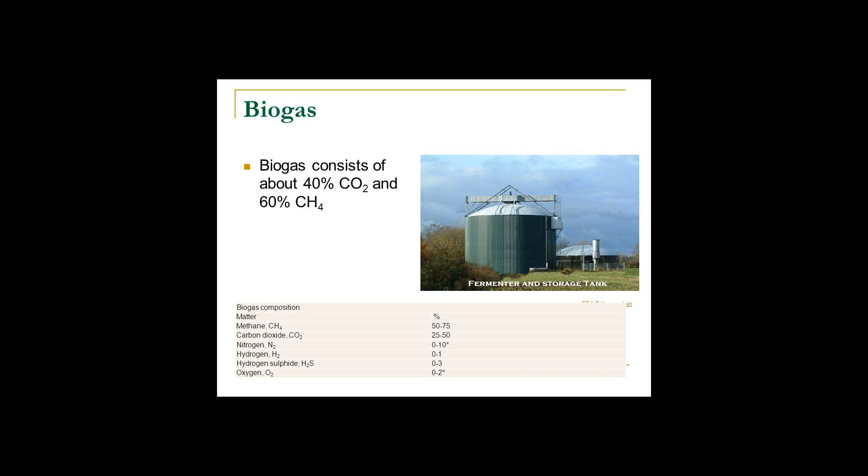Biogas can be produced by anaerobic digestion with anaerobic organisms, which digest material inside a closed system, or fermentation of biodegradable materials. Biogas is primarily methane, CH4, and carbon dioxide, CO2, and may have small amounts of hydrogen sulfide, H2S, moisture and siloxanes. The gases methane, hydrogen, and carbon monoxide, CO, can be combusted or oxidized with oxygen.

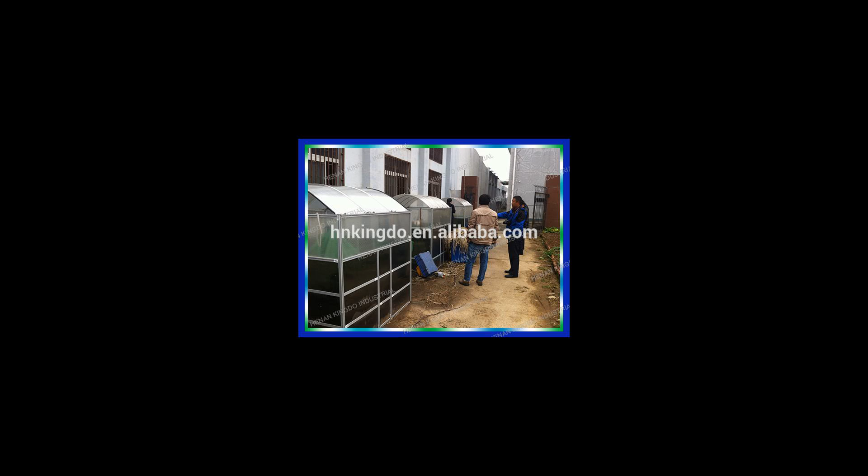This energy release allows biogas to be used as a fuel. It can be used for any heating purpose, such as cooking. It can also be used in a gas engine to convert the energy in the gas into electricity and heat. Biogas can be compressed, the same way as natural gas is compressed to CNG, and used to power motor vehicles.

In the UK, for example, biogas is estimated to have the potential to replace around 17% of vehicle fuel. It qualifies for renewable energy subsidies in some parts of the world. Biogas can be cleaned and upgraded to natural gas standards when it becomes biomethane.

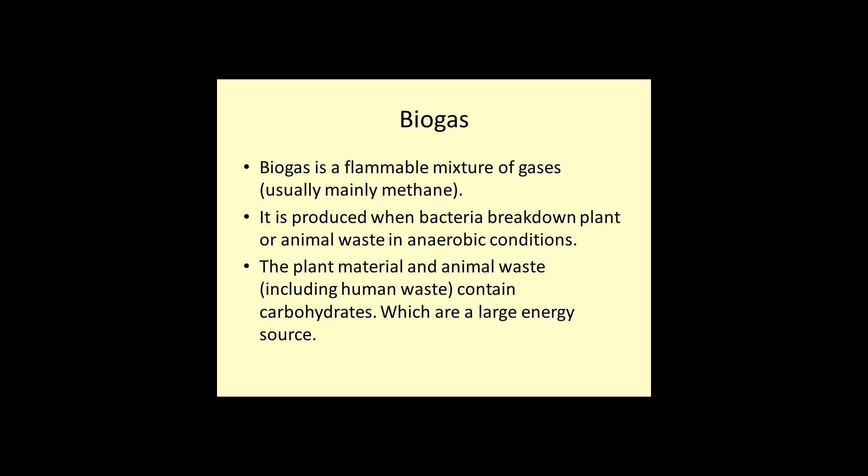Biogas is considered to be a renewable resource because its production and use cycle is continuous, and it generates no net carbon dioxide. Organic material grows, is converted and used and then regrows in a continually repeating cycle. From a carbon perspective, as much carbon dioxide is absorbed from the atmosphere in the growth of the primary bioresource as is released when the material is ultimately converted to energy.

Production. Biogas is produced as landfill gas, LFG, which is produced by the breakdown of biodegradable waste inside a landfill due to chemical reactions and microbes, or as digested gas, produced inside an anaerobic digester. A biogas plant is the name often given to an anaerobic digester that treats farm wastes or energy crops. It can be produced using anaerobic digesters, airtight tanks with different configurations.

These plants can be fed with energy crops such as maize silage or biodegradable wastes including sewage sludge and food waste. During the process, the microorganisms transform biomass waste into biogas, mainly methane and carbon dioxide, and digestate. The biogas is a renewable energy that can be used for heating, electricity, and many other operations that use a reciprocating internal combustion engine, such as GE Jenbacher or Caterpillar gas engines. Other internal combustion engines such as gas turbines are suitable for the conversion of biogas into both electricity and heat.

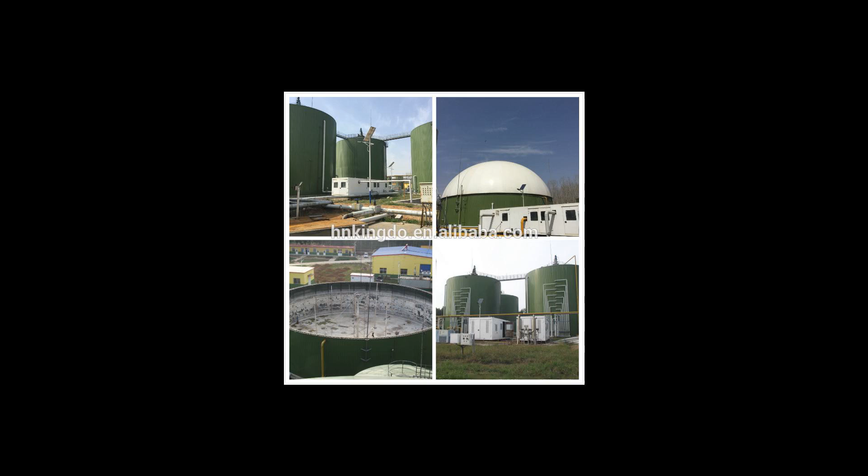Dangers. The dangers of biogas are mostly similar to those of natural gas, but with an additional risk from the toxicity of its hydrogen sulfide fraction. Biogas can be explosive when mixed in the ratio of 1 part biogas to 8 to 20 parts air. Special safety precautions have to be taken for entering an empty biogas digester for maintenance work. It is important that a biogas system never has negative pressure, as this could cause an explosion.

Negative gas pressure can occur if too much gas is removed or leaked. Because of this, biogas should not be used at pressures below 1 column inch of water, measured by a pressure gauge. Frequent smell checks must be performed on a biogas system. If biogas is smelled anywhere, windows and doors should be opened immediately. If there is a fire, the gas should be shut off at the gate valve of the biogas system.

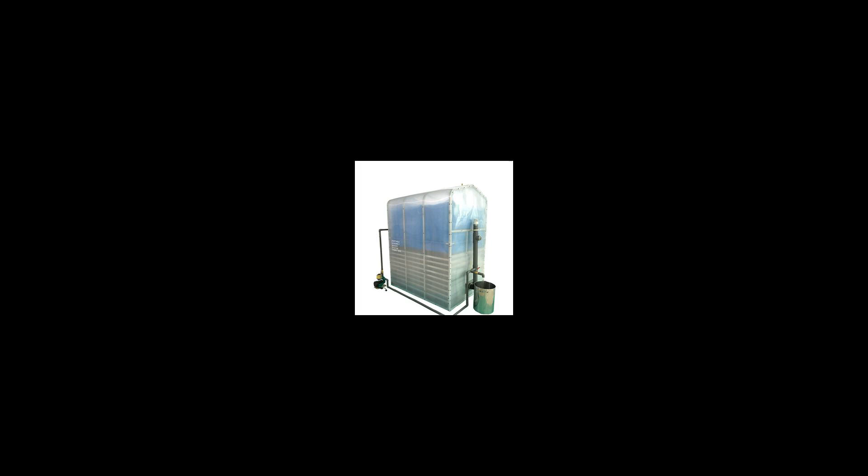Landfill gas. Landfill gas is produced by wet organic waste decomposing under anaerobic conditions in a landfill. The waste is covered and mechanically compressed by the weight of the material that is deposited above. This material prevents oxygen exposure, thus allowing anaerobic microbes to thrive. Biogas builds up and is slowly released into the atmosphere if the site has not been engineered to capture the gas. Landfill gas released in an uncontrolled way can be hazardous, since it can become explosive when it escapes from the landfill and mixes with oxygen.

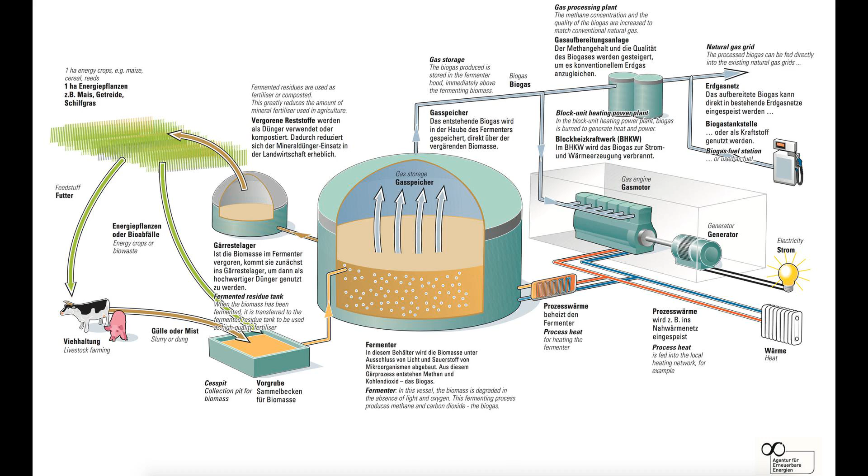The lower explosive limit is 5% methane and the upper is 15% methane. The methane in biogas is 20 times more potent a greenhouse gas than carbon dioxide. Therefore, uncontained landfill gas, which escapes into the atmosphere, may significantly contribute to the effects of global warming. In addition, volatile organic compounds, VOCs, in landfill gas contribute to the formation of photochemical smog.

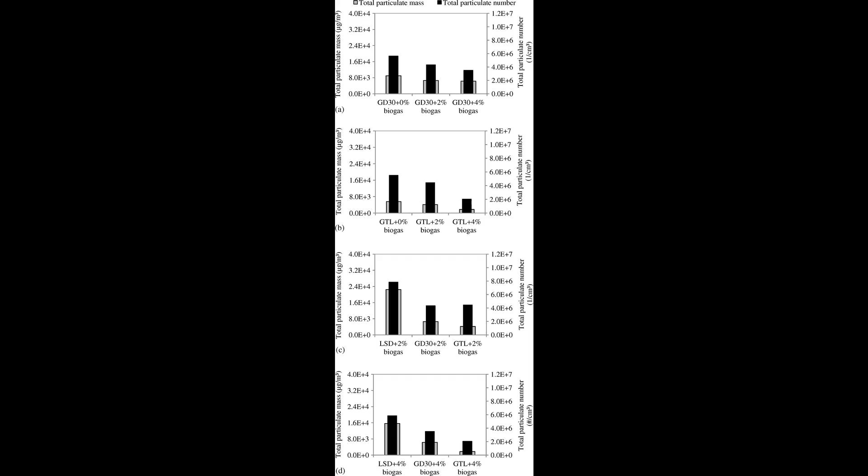Technical. Biochemical oxygen demand, BOD, is a measure of the amount of oxygen required by aerobic microorganisms to decompose the organic matter in a sample of material being used in the biodigester, as well as the BOD for the liquid discharge allows for the calculation of the daily energy output from a biodigester.

Another term related to biodigesters is effluent dirtiness, which tells how much organic material there is per unit of biogas source. Typical units for this measure are in mg BOD/liter. As an example, effluent dirtiness can range between 800 to 1,200 mg BOD/liter in Panama. From 1 kilogram of decommissioned kitchen bio-waste, 0.45 cubic meters of biogas can be obtained. The price for collecting biological waste from households is approximately €70 per ton.

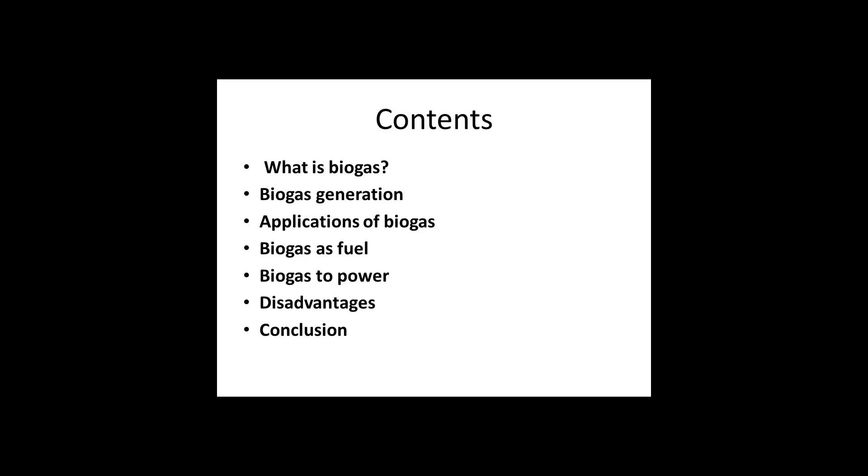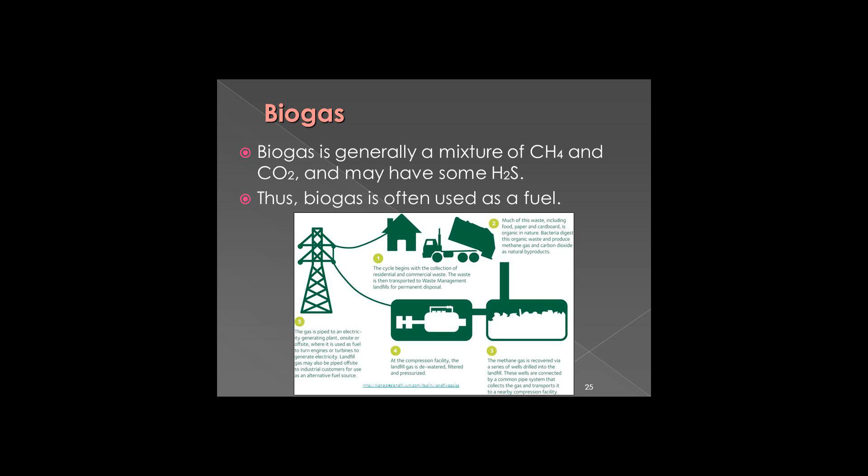Composition. The composition of biogas varies depending upon the substrate composition, as well as the conditions within the anaerobic reactor: temperature, pH, and substrate concentration. Landfill gas typically has methane concentrations around 50%. Advanced waste treatment technologies can produce biogas with 55% to 75% methane, which for reactors with free liquids can be increased to 80% to 90% methane using in situ gas purification techniques.

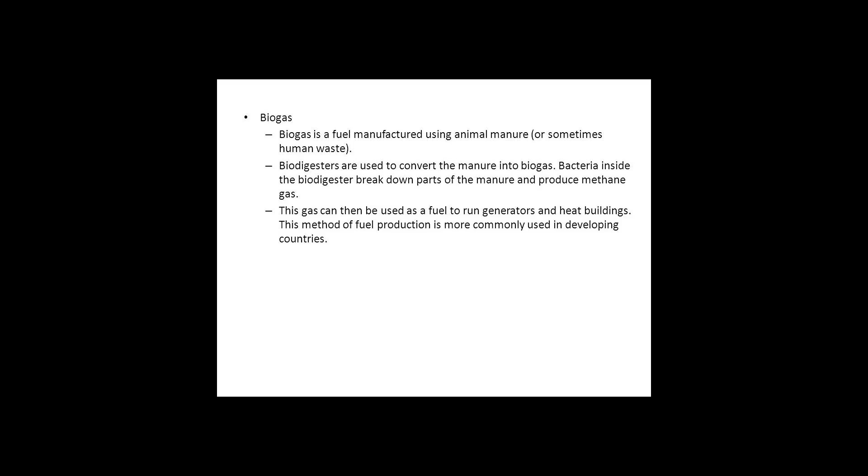As produced, biogas contains water vapor. The fractional volume of water vapor is a function of biogas temperature. Correction of measured gas volume for water vapor content and thermal expansion is easily done via simple mathematics, which yields the standardized volume of dry biogas. In some cases, biogas contains siloxanes. They are formed from the anaerobic decomposition of materials commonly found in soaps and detergents.

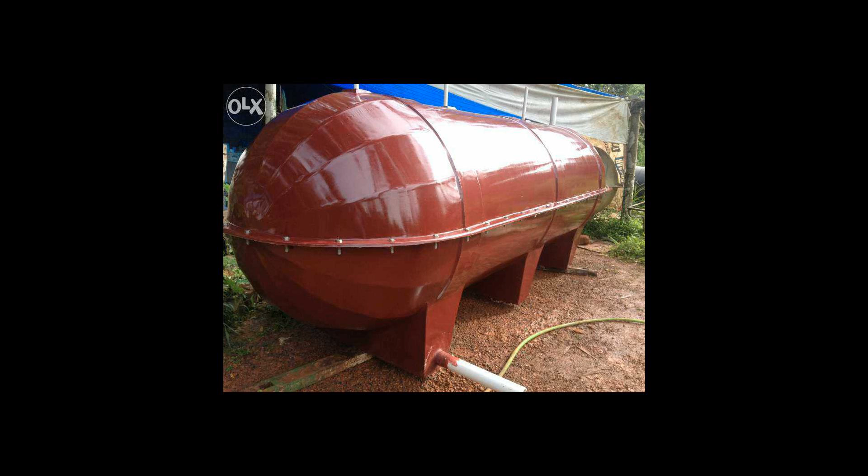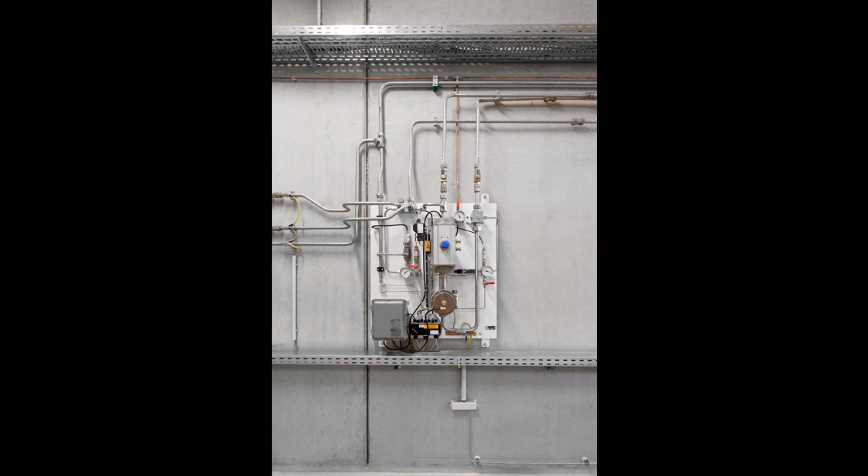During combustion of biogas containing siloxanes, silicon is released and can combine with free oxygen or other elements in the combustion gas. Deposits are formed containing mostly silica, SiO2, or silicates, and can contain calcium, sulfur, zinc, phosphorus. Such white mineral deposits accumulate to a surface thickness of several millimeters and must be removed by chemical or mechanical means. Practical and cost-effective technologies to remove siloxanes and other biogas contaminants are available.

For 1,000 kilograms wet weight of input to a typical biodigester, total solids may be 30% of the wet weight, while volatile suspended solids may be 90% of the total solids. Protein would be 20% of the volatile solids. Carbohydrates would be 70% of the volatile solids. And finally fats would be 10% of the volatile solids.

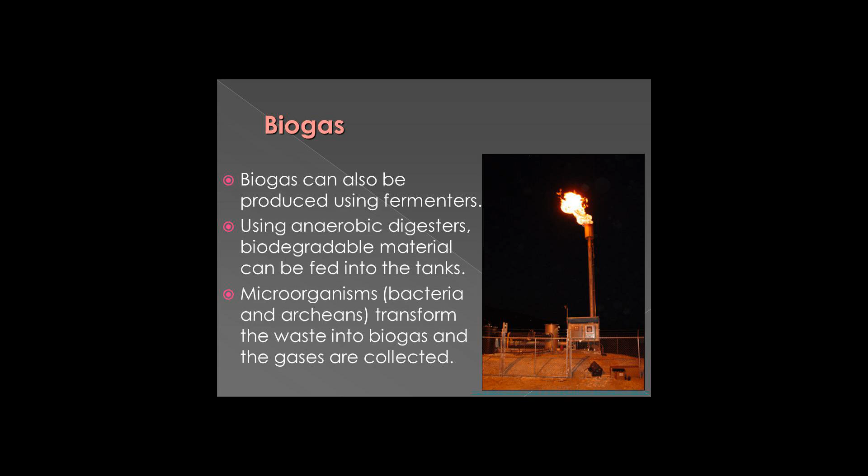Benefits of manure-derived biogas. High levels of methane are produced when manure is stored under anaerobic conditions, during storage and when manure has been applied to the land. Nitrous oxide is also produced as a byproduct of the denitrification process. Nitrous oxide, N2O, is 320 times more aggressive as a greenhouse gas than carbon dioxide and methane 25 times more than carbon dioxide.

By converting cow manure into methane biogas via anaerobic digestion, the millions of cattle in the United States would be able to produce 100 billion kilowatt-hours of electricity, enough to power millions of homes across the United States. In fact, one cow can produce enough manure in one day to generate 3 kilowatt-hours of electricity. Only 2.4 kilowatt-hours of electricity are needed to power a single 100-watt light bulb for one day. Furthermore, by converting cattle manure into methane biogas instead of letting it decompose, global warming gases could be reduced by 99 million metric tons or 4%.

Applications. Biogas can be used for electricity production on sewage works, in a CHP gas engine, where the waste heat from the engine is conveniently used for heating the digester, cooking, space heating, water heating, and process heating. If compressed, it can replace compressed natural gas for use in vehicles, where it can fuel an internal combustion engine or fuel cells and is a much more effective displacer of carbon dioxide than the normal use in on-site CHP plants.

Biogas upgrading. Raw biogas produced from digestion is roughly 60% methane and 29% CO2 with trace elements of H2S. It is not of high enough quality to be used as fuel gas for machinery. The corrosive nature of H2S alone is enough to destroy the internals of a plant.

Methane in biogas can be concentrated via a biogas upgrader to the same standards as fossil natural gas, which itself has to go through a cleaning process, and becomes biomethane. If the local gas network allows, the producer of the biogas may use their distribution networks. Gas must be very clean to reach pipeline quality and must be of the correct composition for the distribution network to accept. Carbon dioxide, water, hydrogen sulfide, and particulates must be removed if present.

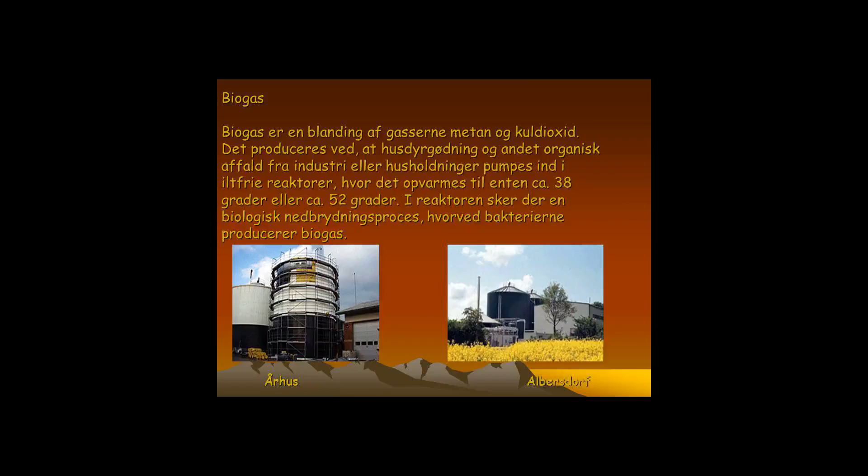The electricity and the heat can be used for on-site generation, resulting in a reduction of losses in the transportation of energy. Typical energy losses in natural gas transmission systems range from 1% to 2%. The current energy losses on a large electrical system range from 5% to 8%.

Biogas in transport. If concentrated and compressed, it can be used in vehicle transportation. Compressed biogas is becoming widely used in Sweden, Switzerland, and Germany. A biogas-powered train, named Biogaståget Amanda, the biogas train Amanda, has been in service in Sweden since 2005.

Biogas powers automobiles. In 1974, a British documentary film titled Sweet as a Nut detailed the biogas production process from pig manure and showed how it fueled a custom-adapted combustion engine. In 2007, an estimated 12,000 vehicles were being fueled with upgraded biogas worldwide, mostly in Europe.

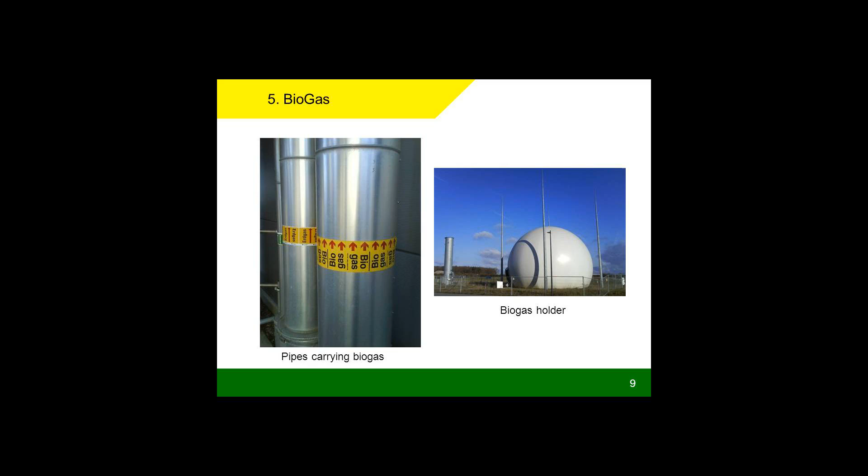Measuring in biogas environments. Biogas is part of the wet gas and condensing gas, or air, category that includes mist fog in the gas stream. The mist fog is predominantly water vapor that condenses on the sides of pipes or stacks throughout the gas flow. Biogas environments include wastewater digesters, landfills, and animal feeding operations. Covered livestock lagoons. Ultrasonic flow meters are one of the few devices capable of measuring in a biogas atmosphere.

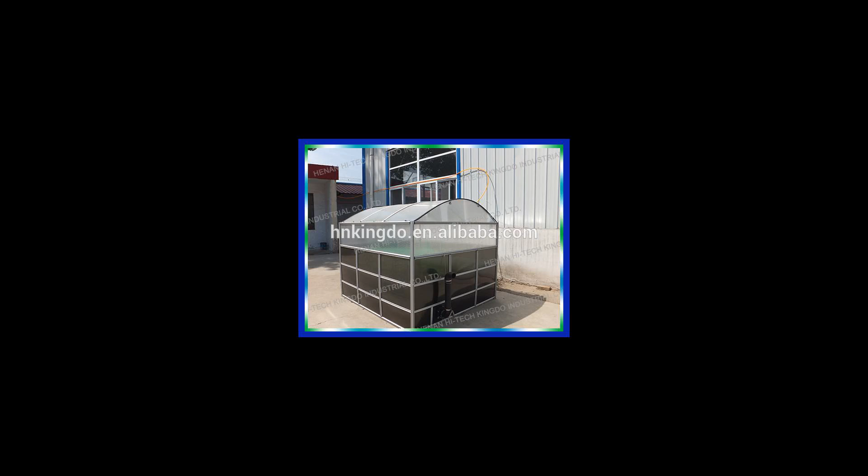Most thermal flow meters are unable to provide reliable data because the moisture causes steady, high flow readings and continuous flow spiking. Although there are single-point insertion thermal mass flow meters capable of accurately monitoring biogas flows with minimal pressure drop, they can handle moisture variations that occur in the flow stream because of daily and seasonal temperature fluctuations, and account for the moisture in the flow stream to produce a dry gas value.

Legislation. European Union. The European Union has legislation regarding waste management in landfill sites called the Landfill Directive. Countries such as the United Kingdom and Germany now have legislation in force that provides farmers with long-term revenue and energy security. United States. The United States legislates against landfill gas as it contains VOCs.

The United States Clean Air Act and Title 40 of the Code of Federal Regulations, CFR, requires landfill owners to estimate the quantity of non-methane organic compounds, NMOCs, emitted. If the estimated NMOC emissions exceeds 50 tons per year, the landfill owner is required to collect the gas and treat it to remove the entrained NMOCs. Treatment of the landfill gas is usually by combustion. Because of the remoteness of landfill sites, it is sometimes not economically feasible to produce electricity from the gas.

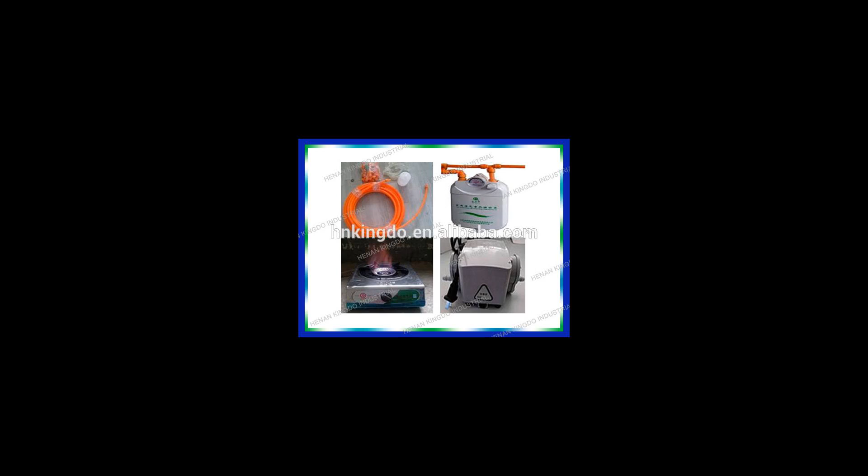Methane biogas from cow manure would be sufficient to produce 100 billion kilowatt-hours, enough to power millions of homes across America. Furthermore, methane biogas has been tested to prove that it can reduce 99 million metric tons of greenhouse gas emissions, or about 4% of the greenhouse gases produced by the United States.

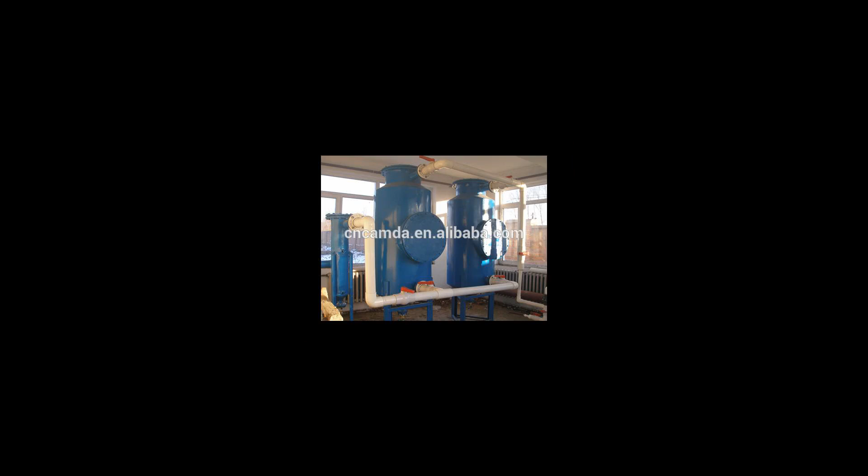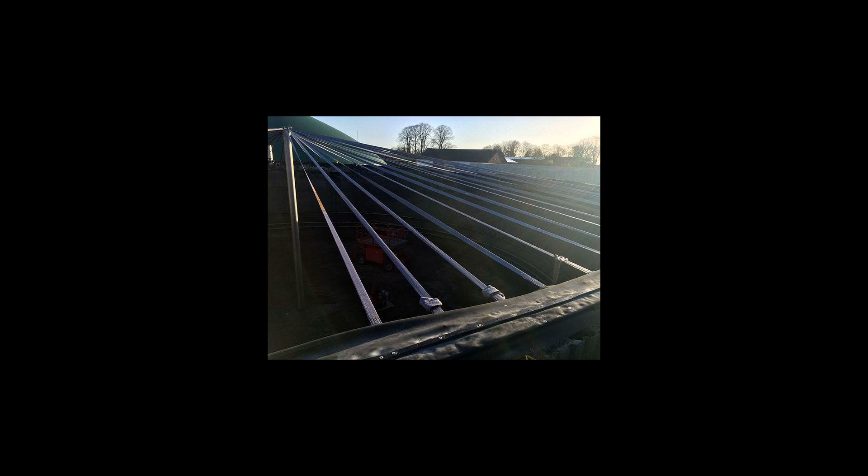In Vermont, for example, biogas generated on dairy farms was included in the CVPS Cow Power program. The program was originally offered by Central Vermont Public Service Corporation as a voluntary tariff, and now with a recent merger with Green Mountain Power is now the GMP Cow Power program. Customers can elect to pay a premium on their electric bill, and that premium is passed directly to the farms in the program.

In Sheldon, Vermont, Green Mountain Dairy has provided renewable energy as part of the Cow Power program. It started when the brothers who own the farm, Bill and Brian Rowell, wanted to address some of the manure management challenges faced by dairy farms, including manure odor and nutrient availability for the crops they need to grow to feed the animals. They installed an anaerobic digester to process the cow and milking center waste from their 950 cows to produce renewable energy, a bedding to replace sawdust, and a plant-friendly fertilizer.

The energy and environmental attributes are sold to the GMP Cow Power program. On average, the system run by the Rowells produces enough electricity to power 300 to 350 other homes. The generator capacity is about 300 kilowatts.

In Hereford, Texas, cow manure is being used to power an ethanol power plant. By switching to methane biogas, the ethanol power plant has saved 1,000 barrels of oil a day. Overall, the power plant has reduced transportation costs and will be opening many more jobs for future power plants that will rely on biogas.

In Oakley, Kansas, an ethanol plant considered to be one of the largest biogas facilities in North America is using an Integrated Manure Utilization System (IMUS) to produce heat for its boilers by utilizing feedlot manure, municipal organics and ethanol plant waste. At full capacity, the plant is expected to replace 90% of the fossil fuel used in the manufacturing process of ethanol.

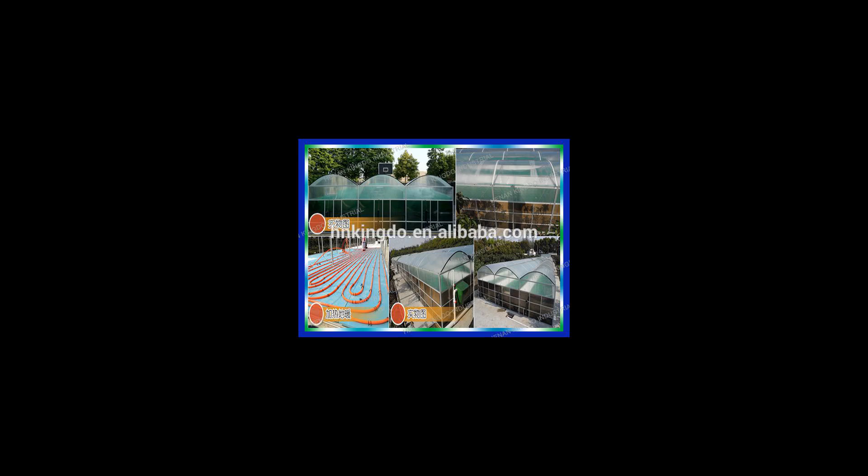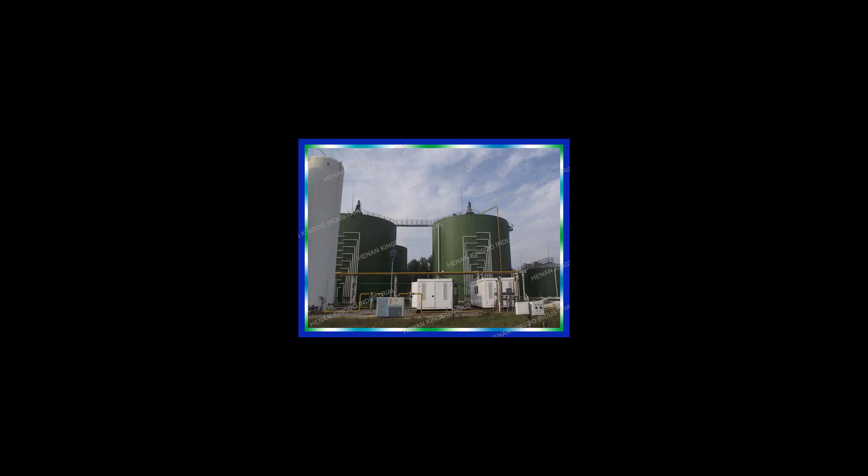Europe. The level of development varies greatly in Europe. While countries such as Germany, Austria and Sweden are fairly advanced in their use of biogas, there is a vast potential for this renewable energy source in the rest of the continent, especially in Eastern Europe. Different legal frameworks, education schemes and the availability of technology are among the prime reasons behind this untapped potential. Another challenge for the further progression of biogas has been negative public perception.

In February 2009, the European Biogas Association, EBA, was founded in Brussels as a non-profit organization to promote the deployment of sustainable biogas production and use in Europe. EBA's strategy defines 3 priorities: establish biogas as an important part of Europe's energy mix, promote source separation of household waste to increase the gas potential, and support the production of biomethane as vehicle fuel. In July 2013, it had 60 members from 24 countries across Europe.

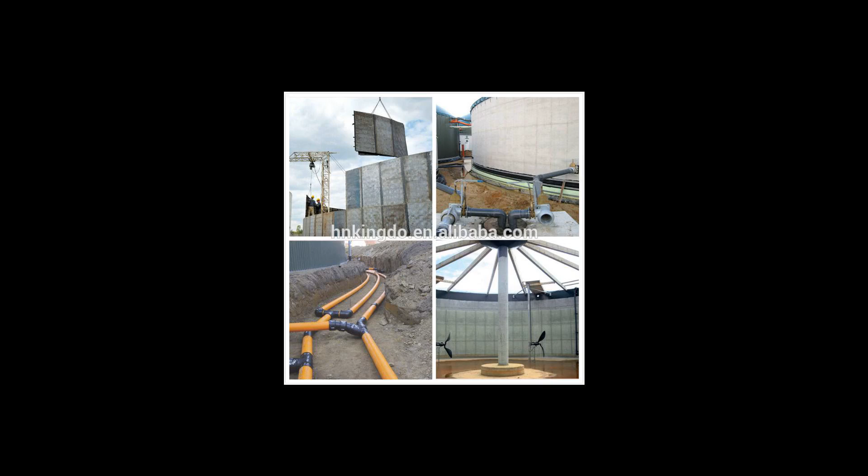UK. As of September 2013, there are about 130 non-sewage biogas plants in the UK. Most are on-farm, and some larger facilities exist off-farm, which are taking food and consumer wastes. On 5 October 2010, biogas was injected into the UK gas grid for the first time. Sewage from over 30,000 Oxfordshire homes is sent to Didcot Sewage Treatment Works, where it is treated in an anaerobic digester to produce biogas, which is then cleaned to provide gas for approximately 200 homes. In 2015, the green energy company Ecotricity announced their plans to build 3 grid-injecting digesters.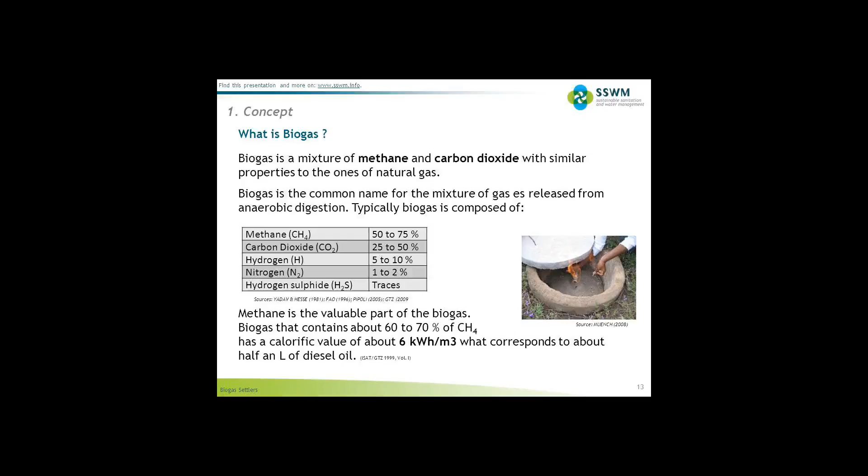Germany. Germany is Europe's biggest biogas producer and the market leader in biogas technology. In 2010, there were 5,905 biogas plants operating throughout the country. Lower Saxony, Bavaria, and the Eastern Federal States are the main regions. Most of these plants are employed as power plants. Usually the biogas plants are directly connected with a CHP, which produces electric power by burning the biomethane. The electrical power is then fed into the public power grid.

In 2010, the total installed electrical capacity of these power plants was 2,291 megawatts. The electricity supply was approximately 12.8 terawatt-hours, which is 12.6% of the total generated renewable electricity. Biogas in Germany is primarily extracted by the co-fermentation of energy crops, called NawaRo, an abbreviation of nachwachsende Rohstoffe, German for renewable resources, mixed with manure. The main crop used is corn.

Organic waste and industrial and agricultural residues such as waste from the food industry are also used for biogas generation. In this respect, biogas production in Germany differs significantly from the UK, where biogas generated from landfill sites is most common.

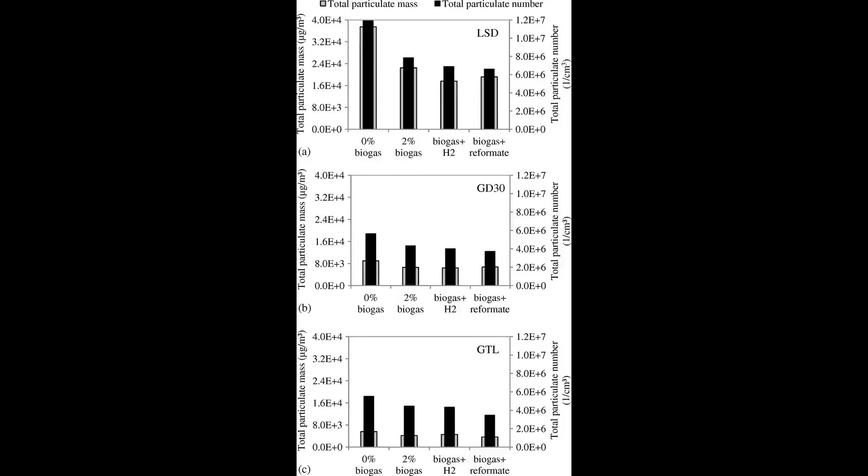Biogas production in Germany has developed rapidly over the last 20 years. The main reason is the legally created frameworks. Government support of renewable energy started in 1991 with the Electricity Feed-in Act (STREG). This law guaranteed the producers of energy from renewable sources the feed into the public power grid. Thus the power companies were forced to take all produced energy from independent private producers of green energy.

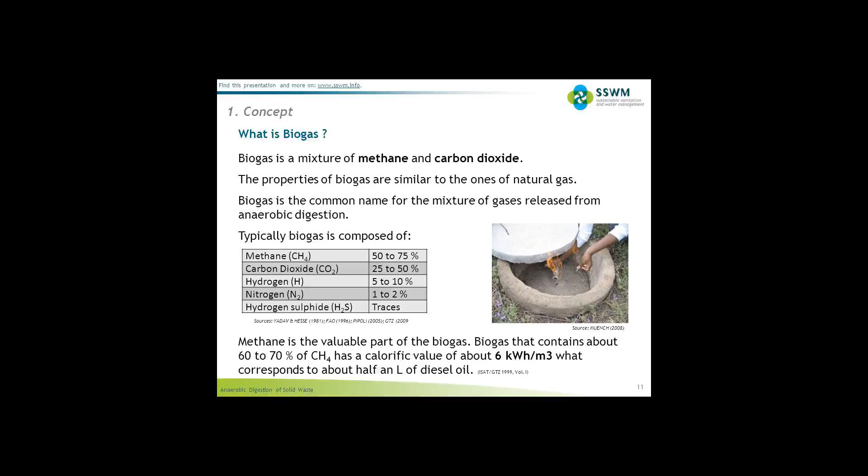In 2000, the Electricity Feed-in Act was replaced by the Renewable Energy Sources Act (EEG). This law even guaranteed a fixed compensation for the produced electric power over 20 years. The amount of around 8 cents per kilowatt-hour gave farmers the opportunity to become energy suppliers and gain a further source of income. The German agricultural biogas production was given a further push in 2004 by implementing the so-called NawaRo bonus. This is a special payment given for the use of renewable resources, that is, energy crops.

In 2007, the German government stressed its intention to invest further effort and support in improving the renewable energy supply to provide an answer on growing climate challenges and increasing oil prices by the Integrated Climate and Energy Program. This continual trend of renewable energy promotion induces a number of challenges facing the management and organization of renewable energy supply that has also several impacts on the biogas production.

The first challenge to be noticed is the high area consumption of the biogas electric power supply. In 2011, energy crops for biogas production consumed an area of circa 800,000 hectares in Germany. This high demand of agricultural areas generates new competition with the food industries that did not exist hitherto. Moreover, new industries and markets were created in predominantly rural regions, entailing different new players with an economic, political and civil background. Their influence and acting has to be governed to gain all advantages this new source of energy is offering. Finally, biogas will furthermore play an important role in the German renewable energy supply if good governance is focused.

Indian subcontinent. Biogas in India has been traditionally based on dairy manure as feedstock, and these gobar gas plants have been in operation for a long period of time, especially in rural India. In the last 2 to 3 decades, research organizations with a focus on rural energy security have enhanced the design of the systems, resulting in newer, efficient, low-cost designs such as the Deenabandhu model. The Deenabandhu model is a new biogas production model popular in India. Deenabandhu means friend of the helpless.

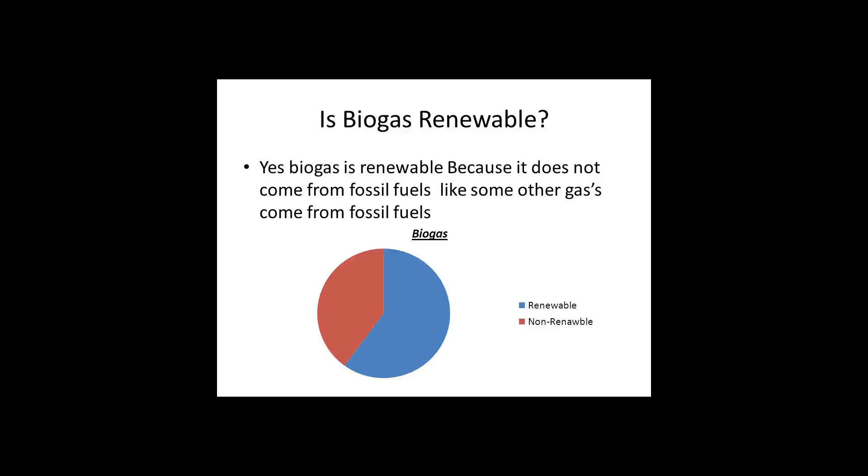The unit usually has a capacity of 2 to 3 cubic meters. It is constructed using bricks or by a ferro-cement mixture. In India, the brick model costs slightly more than the ferro-cement model. However, India's Ministry of New and Renewable Energy offers some subsidy per model constructed.

LPG, liquefied petroleum gas, is a key source of cooking fuel in urban India, and its prices have been increasing along with the global fuel prices. Also, the heavy subsidies provided by the successive governments in promoting LPG as a domestic cooking fuel have become a financial burden, renewing the focus on biogas as a cooking fuel alternative in urban establishments. This has led to the development of prefabricated digesters for modular deployments as compared to RCC and cement structures which take a longer duration to construct.

Renewed focus on process technology like the Biourja process model has enhanced the stature of medium and large-scale anaerobic digesters in India as a potential alternative to LPG as primary cooking fuel. In India, Nepal, Pakistan and Bangladesh, biogas produced from the anaerobic digestion of manure in small-scale digestion facilities is called gobar gas. It is estimated that such facilities exist in over 2 million households in India, 50,000 in Bangladesh and thousands in Pakistan, particularly North Punjab.

Due to the thriving population of livestock, the digester is an airtight circular pit made of concrete with a pipe connection. The manure is directed to the pit, usually straight from the cattle shed. The pit is filled with a required quantity of wastewater. The gas pipe is connected to the kitchen fireplace through control valves. The combustion of this biogas has very little odor or smoke, owing to simplicity in implementation and use of cheap raw materials in villages.

It is one of the most environmentally sound energy sources for rural needs. One type of these systems is the Sintex digester. Some designs use vermiculture to further enhance the slurry produced by the biogas plant for use as compost.

To create awareness and associate the people interested in biogas, the Indian Biogas Association was formed. It aspires to be a unique blend of nationwide operators, manufacturers and planners of biogas plants, and representatives from science and research. The association was founded in 2010 and is now ready to start mushrooming. Its motto is, propagating biogas in a sustainable way.

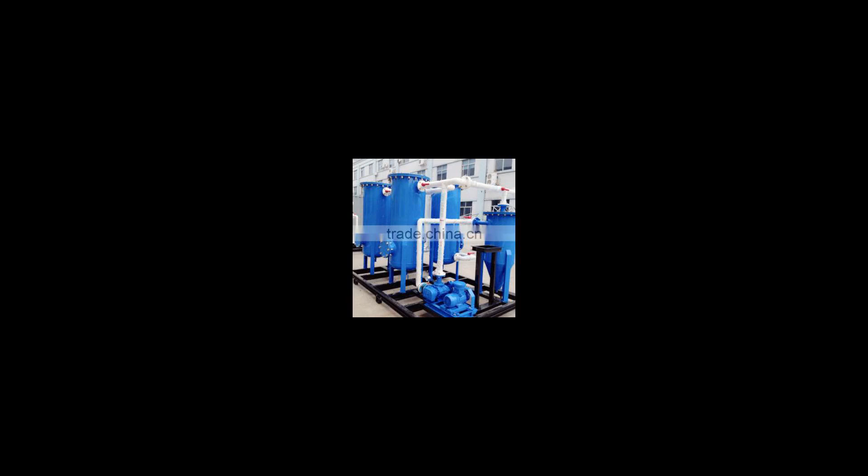Another precondition is the temperature that affects the fermentation process. With an optimum at 36°C, the technology especially applies for those living in a sub-tropical climate. This makes the technology for smallholders in developing countries often suitable, depending on size and location. A typical brick-made fixed-dome biogas plant can be installed at the yard of a rural household, with the investment between $300 to $500 in Asian countries and up to $1,400 in the African context.

A high-quality biogas plant needs minimum maintenance costs and can produce gas for at least 15 to 20 years without major problems and reinvestments. For the user, biogas provides clean cooking energy, reduces indoor air pollution, and reduces the time needed for traditional biomass collection, especially for women and children. The slurry is a clean organic fertilizer that potentially increases agricultural productivity.

Domestic biogas technology is a proven and established technology in many parts of the world, especially Asia. Several countries in this region have embarked on large-scale programs on domestic biogas, such as China and India. The Netherlands Development Organization, SNV, supports national programs on domestic biogas that aim to establish commercially viable domestic biogas sectors in which local companies market, install and service biogas plants for households.

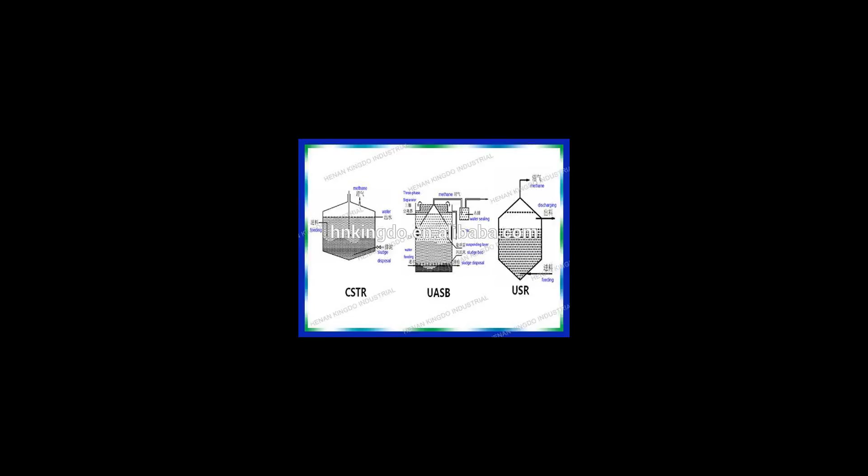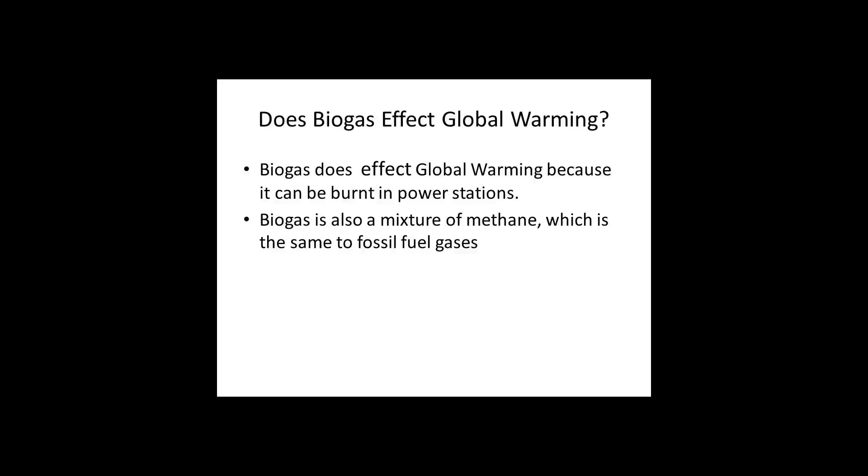In Asia, SNV is working in Nepal, Vietnam, Bangladesh, Bhutan, Cambodia, Laos PDR, Pakistan and Indonesia, and in Africa, Rwanda, Senegal, Burkina Faso, Ethiopia, Tanzania, Uganda, Kenya, Benin and Cameroon. In South Africa, a pre-built biogas system is manufactured and sold. One key feature is that installation requires less skill and is quicker to install as the digester tank is pre-made plastic.

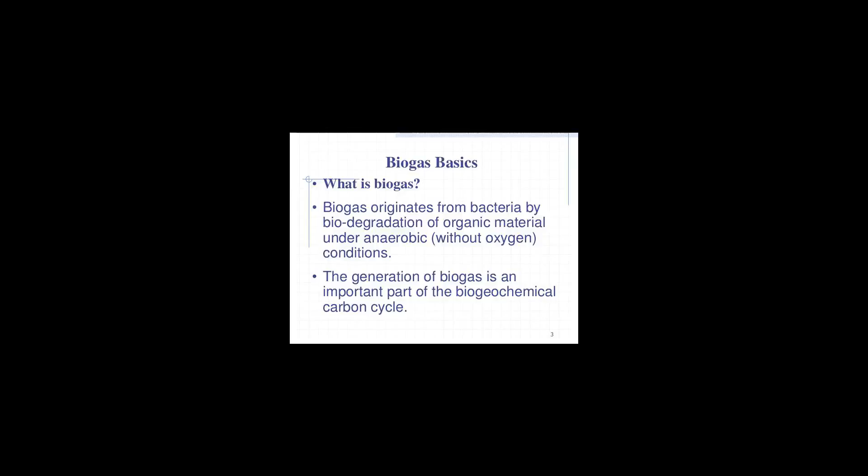Society and culture. In the 1985 Australian film Mad Max Beyond Thunderdome, the post-apocalyptic settlement Bartertown is powered by a central biogas system based upon a piggery. As well as providing electricity, methane is used to power Bartertown's vehicles. Cowtown, written in the early 1940s, discussed the travails of a city vastly built on cow manure and the hardships brought upon by the resulting methane biogas. Carter McCormick, an engineer from a town outside the city, is sent in to figure out a way to utilize this gas to help power, rather than suffocate, the city.

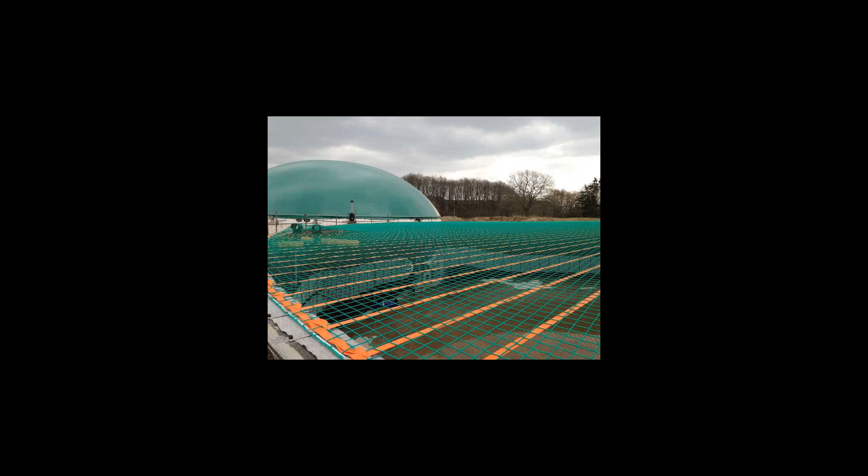See also. Further reading. Updated Guidebook on Biogas Development. United Nations. New York. 1984. Energy Resources Development Series No. 27. p. 178. 30 centimeters. Book. Biogas from Waste and Renewable Resources. Wiley VCH Verlag GmbH & Co. KGaA. 2008. Dieter Deublein and Angelika Steinhauser.

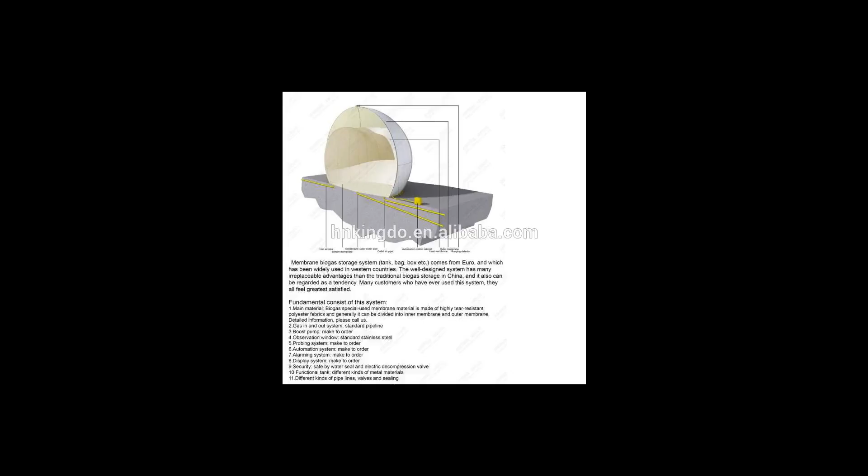A comparison between shale gas in China and unconventional fuel development in the United States. Health, Water and Environmental Risks by Paolo Farah and Riccardo Tremolada. This is a paper presented at the Colloquium on Environmental Scholarship 2013 hosted by Vermont Law School. The 11th of October 2013. Marchaim, Uri. 1992. Biogas Processes for Sustainable Development. FAO. ISBN 925-103126-6. Woodhead Publishing Series. 2013. The Biogas Handbook. Science, Production and Applications. ISBN 978-0857094988.